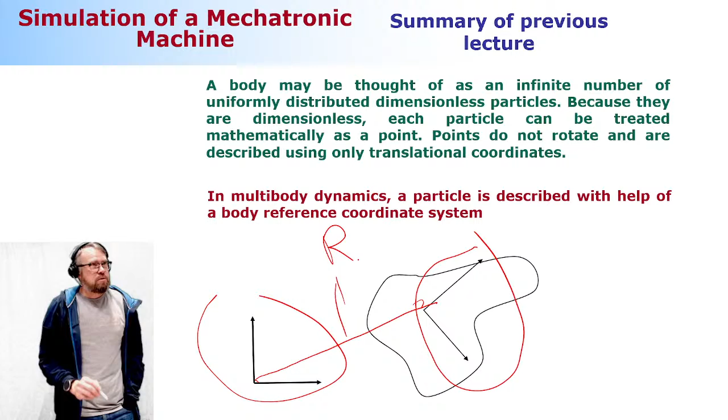We're going to use something that is called the body reference coordinate system. The body reference coordinate system is this one. It is attached to the body. So the body moves, the coordinate system follows; the body rotates, same story. Now, we're going to use the kinematic notations so that we can first describe where the origin of the body reference coordinate system is with respect to the reference coordinate system, using vector R. Vector R consists of two components, projections along this axis and this axis. And then we're going to use a 2 by 2 rotation matrix to take the rotation of this coordinate system into account.

All right, that's the mapping. Mapping that converts a description from one coordinate system to another. And this is going to be defined as matrix A. And then we're using vector U bar to define one single point, a particle if you may. So if I say the particle is located here, my vector U bar goes here. It's a little bit of a messy picture. So this is where the particle is located with respect to the reference coordinate system. That's called R. That's our kinematics.

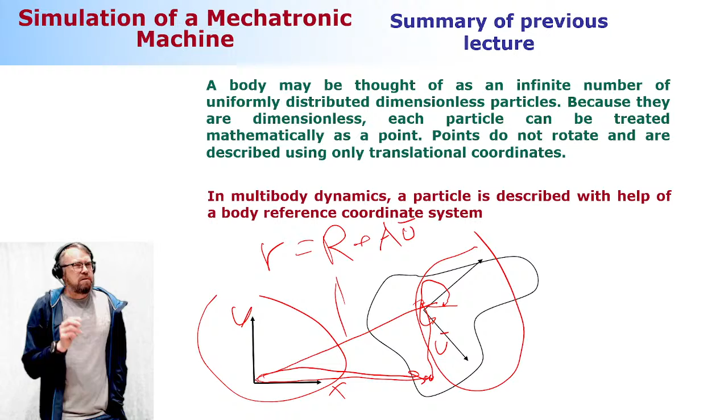That's what you have to follow no matter what. Every now and then in life and multi-body system dynamics, there are temptations to make life easier. And here the temptation could be that on some occasion it looks like there is a shortcut to the particle. Never ever take a shortcut. Always travel via the body reference coordinate system. That's how it goes. All right.

So here is the kinematics I just mentioned. I have here two components, one that is taking care of the translation and one that is taking care of the rotation. This one here is a 2 by 2 rotation matrix that is mathematically orthogonal, meaning that if you make vectors out of these columns, these vectors will be perpendicular with respect to each other. Perpendicular in the planar case means they will have a 90 degree angle with respect to each other. They are also unit in length, as is the case with the coordinate axes x and y.

And then this one here is the vector u bar we discussed a little while ago. That's the kinematics. Always, always, always follow this kinematics. And now it's confusing because we're using this vector u bar to define where the particle is located. The particle does not have rotational degrees of freedom, but the body reference coordinate system does. Don't get confused about that. Understand the difference between the point and the body. Point, no rotational degrees of freedom. Body, yes, rotational degrees of freedom.

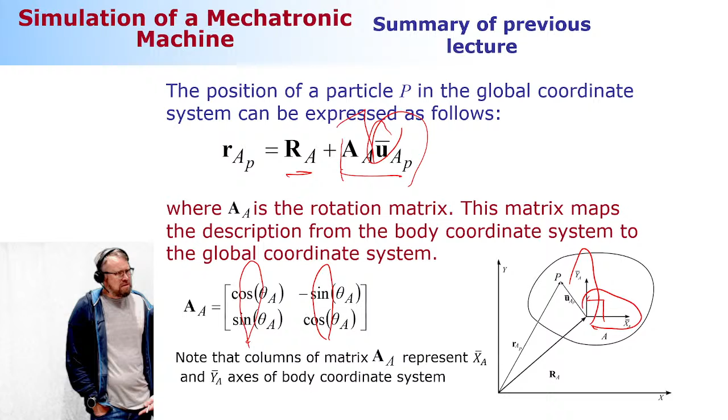A little bit of delay. How serious is it? Okay, 10 to 15 seconds is not bad. I can tune it, I can make it shorter than that, but that comes with the risk that the streaming is not healthy anymore. So let's not do it, because I can see that the connection is excellent.

Okay, so with that, what about three-dimensional space? How can we describe a particle in three-dimensional space? Same concept, different dimensions. Different in the sense that this vector R will consist of three components because of the three axes. Rotation matrix A will have dimension 3 by 3. And the vector u bar consists of three components, again because of the three axes.

Okay, this rotation matrix, one way to describe it is based on Euler angles. Euler angles is a method that uses three successive rotations. Successive means rotation after a rotation. So how does it happen? You have two coordinate systems initially parallel with respect to each other. And then you introduce the rotation, which is the amount of phi.

Well, Mustafa is not listening to me, but this one here, the phi, amount of phi around the z-axis. Then you have a coordinate system once rotated, and then you introduce the second rotation, this time around the x-axis, amount of theta. And again, you have a twice rotated coordinate system. This time you introduce the rotation psi. I knew it, I just wanted to test if you guys know. So, psi.

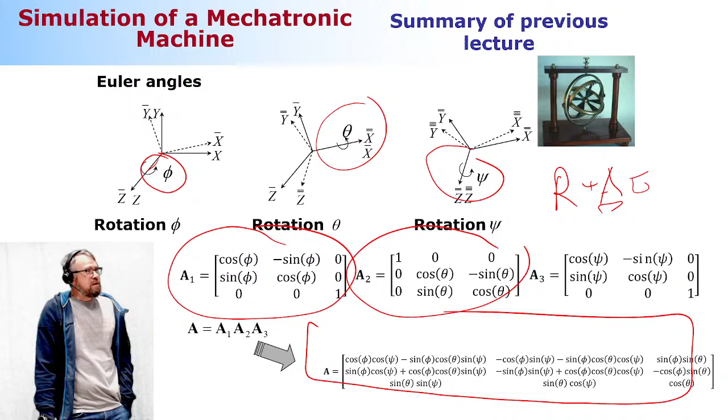So what you do then, mathematically, is describe each one of these rotations as shown here. And the successive rotations you take into account by multiplying these matrices together. And this is how it looks. Don't bother to memorize it. It makes no sense, you do not need that. But you need to understand the concept itself. Okay. All right, here's an example.

There is a question which says that the body rotates 90 degrees around the x-axis, because you see that this here is obviously the x-axis. Define the rotation matrix by using Euler angles. This is a matter of substitution. The first angle is going to be 0. The second angle is the one asked here, 90 degrees, which is pi divided by 2. And the third angle is 0. Once you do the substitution, this is how it looks. No thinking, just substitution, and that will do the job for you. Okay.

Tips for weekly assignments. Be careful with the radians and degrees when you're using trigonometric functions, because they will make a significant difference for sure. So make sure that you're not getting mixed up about degrees and radians.

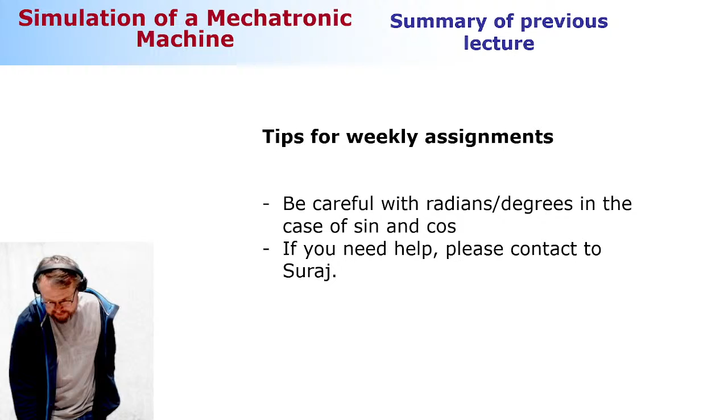All right, then still one more thing about the summary. This is how you can define the velocity. Very mechanical. And once we set the kinematics, it's very important to be consistent, all the time consistent. And you're going to learn this consistently along the course, when we're looking at the different things in this course.

Okay, so we differentiate particle position with respect to time. We've got two components that are translational velocity and angular velocity. When you differentiate this one more time with respect to time, we get acceleration. Acceleration consists of three components. Translational acceleration, normal acceleration due to the rotation, angular velocity. So acceleration is quadratically related to velocities, okay? And then tangential acceleration due to the angular acceleration.

That's it. Three acceleration components, meaning that later when we relate our inertia we will have two different kinds of components. One that is linearly related to acceleration, and one that is quadratically related to velocities. Correct, you heard me correct. So there will be an inertia component that is quadratically related to velocities. But you're going to learn that a bit later. So no worries today, but that comes a bit later.

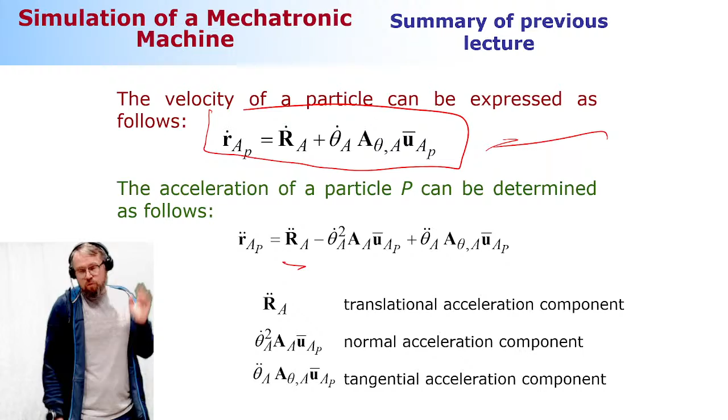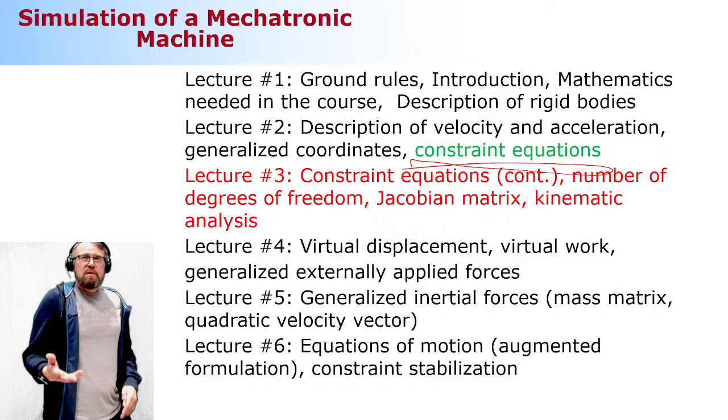Okay, constraint equations. Finally, constraint equations. This is where we are at. And there's a lot of details to look at. But this is, roughly speaking, motion limitation. The way we can connect bodies together. How we can do that mathematically. We know how to do that in real life. There are different kinds of joints, revolute joints, translational joints, so on and so forth. But how we do that mathematically, that you're going to learn today. Okay.

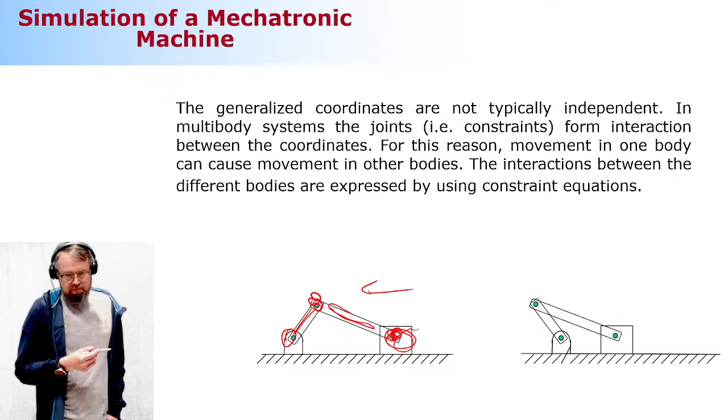Next, we're going to take a look at how we can describe these motion limitations, or motion limiters, if you may. Okay? So it goes like this. Let's first look at the big concept, and then let's look at the details right after that. Remember what we learned a week ago. We learned that every body needs 3 generalized coordinates. Always 3 generalized coordinates. And those 3 generalized coordinates are Rx, Ry, and theta for every body.

Now, if I have 3 bodies, how many generalized coordinates do I need? 9, correct, 9. Because 3 bodies, 3 multiplied by 3, that's 9. So if I have 10 bodies, I need 30, correct. That's how it goes. So that's the amount of coordinates I need to describe every single body in my system. Bodies in my system, okay?

All right, then you can list these variables. You can put them in a vector which is called generalized coordinates. The number of components and what they are depends on how many bodies you're dealing with, all right? So if I have just one body, this vector consists of 3 components. 2 bodies, 6 components, so on and so forth. Makes sense? Okay.

But then I'm going to introduce another vector. This time it is very unclear. It's just a concept for you. And this other vector is the constraint equations, these motion limitations. Motion limitations that connect these coordinates together. So these motion limitations are a function of generalized coordinates and possibly time.

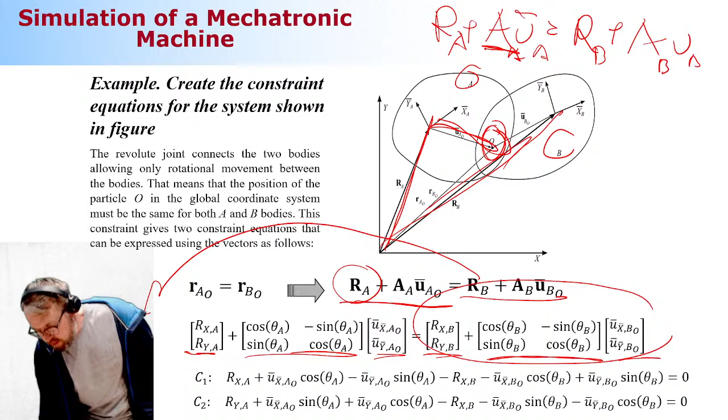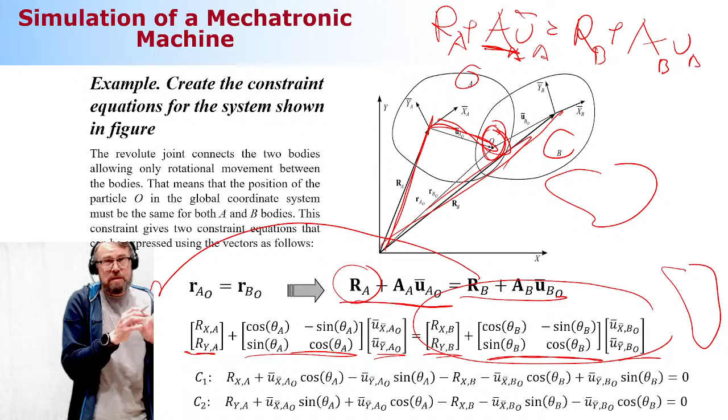So the question is, if there is a potato-shaped body here, A, and a potato-shaped body here, B, how do you connect these together? Well, if you want to connect them using a revolute joint, how do you do that in real life? By putting them together, because otherwise you cannot. So even though this is mathematics, it's not so far away from real life. You have to make them merge at the joint location. If they are like this, there is no revolute joint this big. There are different kinds of joints that don't necessarily need the bodies to be so near each other, but the revolute joint is the case where they need to be close to each other. Okay?

Is there Team Belgium today? No? Last week there was a Team Belgium for sure. But now I guess there is, but you guys just chose not to be my friend. That's okay, I'm used to that.

I'm not even disappointed. Okay, all right, two constraint equations. Remember what I just discussed. I said that this revolute joint allows these bodies to move this way, this way, this way, and relatively with respect to each other. That's a total of 4 different ways. How many generalized coordinates do I have when I'm dealing with two bodies? 6. 6 minus the number of constraint equations is my number of degrees of freedom. 6 minus 2, 4 degrees of freedom. So this is a 4 degrees of freedom system. Somebody was voting in the chat too.

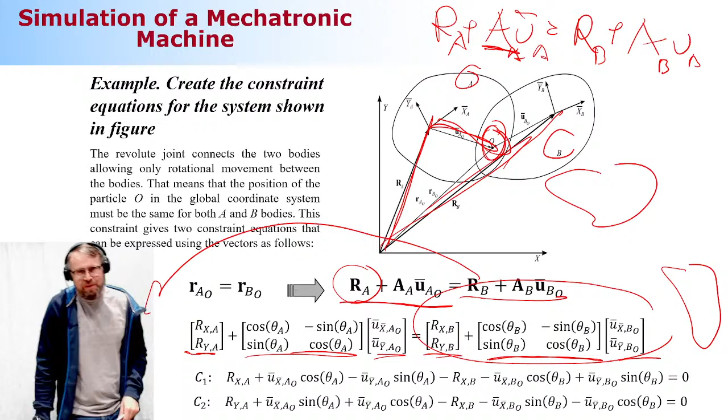Correct voting. So here's the number of degrees of freedom. Here's the formula to compute the number of degrees of freedom. The ingredients needed to compute the number of degrees of freedom are the number of generalized coordinates. How do we know that? We know that when we know the number of bodies. 10 bodies, 30 generalized coordinates. 2 bodies, 6 generalized coordinates.

How many constraint equations do we need? Well, that depends on what kind of joints we introduce. Some of the joints in the planar case need 2 constraint equations. Some of them need just 1. Okay, but that's going to be the number of degrees of freedom. That's how it goes.

Now, the number of degrees of freedom can have 3 different scenarios. And now I recommend that you put everything aside. Look at me, because I have some important information that I would like to share with you. Now, breathe very deeply. And one more time.

Now, these different scenarios are such that if the number of degrees of freedom is more than 0, 1, 2, 3, and so forth, we have a dynamically driven system. What does that mean? It means that, for example, this crankshaft mechanism will have 1 degree of freedom. And this 1 degree of freedom is actuated by a force or a moment. The moment introduced to this crank body is my force. This is a dynamically driven system.

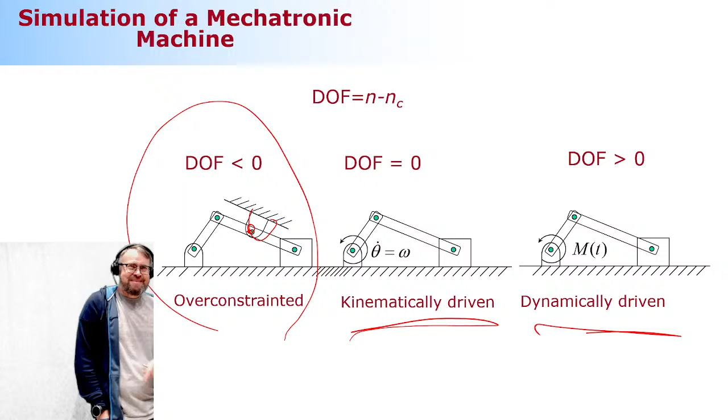But because you have such big brains, you have no difficulties whatsoever, so you understand this immediately. Right. You figured this out already when you stepped into this lecture room, maybe even earlier than that. Okay? So no problems. Guys back there, everything is okay.

Very good. Okay. The number of degrees of freedom in a kinematically driven system is what?

No, I'm not going to mention that anymore. But the game is on. So what is the success rate today? No, it will not. But how high does it go? 90. So Mustafa had a good sense of how high the success rate can be. He's saying 90, 96. And look at me, my hands are visible all the time, so it's not me that is voting incorrectly. So it's you, one of you.

Okay, so we'll get back to that. Somebody is saying there's going to be a dance today. I don't think so. That never happened, because I don't know how to dance, so I can make promises like that because I'm on the safe side.

All right, so let's continue then. Here are the number of constraint equations needed. I mentioned earlier that this is ranging from 2 to 1. I was incorrect, it's ranging from 3 to 1. So if there's a fixed joint, then it's 3, which, by the way, is not a good idea to model. You will learn later why it is not a good idea. But simply stated, every body needs 3 generalized coordinates, and that's the case also for the bodies that are connected to ground. So we'll have 3 generalized coordinates, 3 constraint equations.

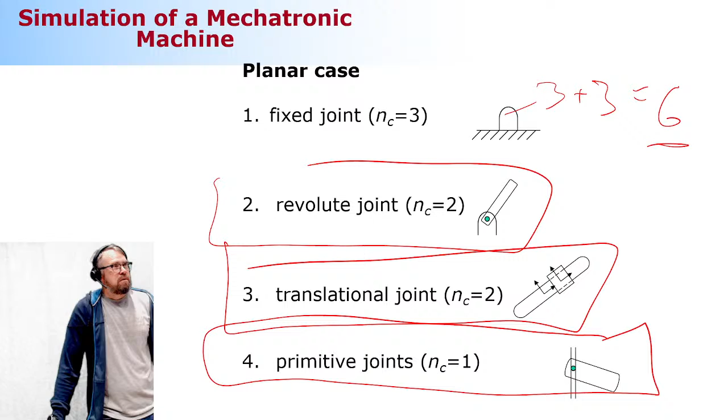Okay, let's practice a little bit. Here are 2 different kinds of mechanisms. We're going to practice a little bit, and then there's going to be another in-class quiz, but I'm expecting you to do the math. What is the number of degrees of freedom in this case? Let's first count the number of generalized coordinates. How many moving bodies do I have here? 1, 2, 3. How many generalized coordinates? 9. All right.

Then let's count how many translational joints I have. 1 translational joint, so that's minus 2 plus. And then let's count how many revolute joints I have: 1, 2, 3, 4. Happy? You shouldn't be, because this is not a joint. This is just to make you feel confused. So this comes 2 multiplied by 3. Sorry about the unclear writing. So that's 6, plus 2, so 8 constraint equations, 1 degree of freedom. So you got it.

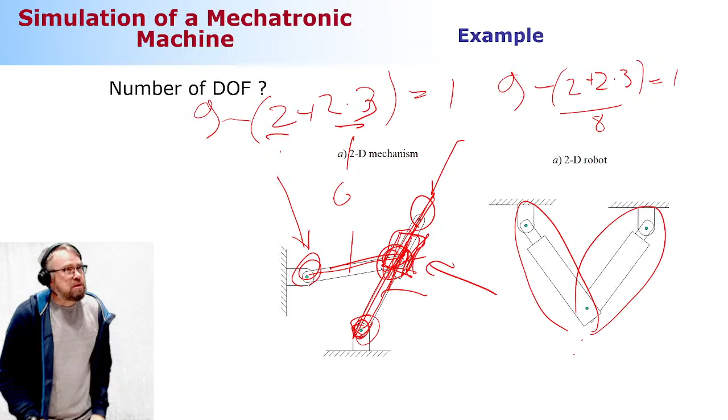Okay, the next. How many moving bodies? This is a little bit unclear drawing, but these are hydraulic cylinders. A hydraulic cylinder consists of 2 components, a cylinder and a piston, and these 2 bodies are connected together via a translational joint. So how many moving bodies do I have here? Let me repeat: each hydraulic cylinder consists of 2 bodies. So how many bodies in total? 4, correct. Meaning how many generalized coordinates? 12, correct.

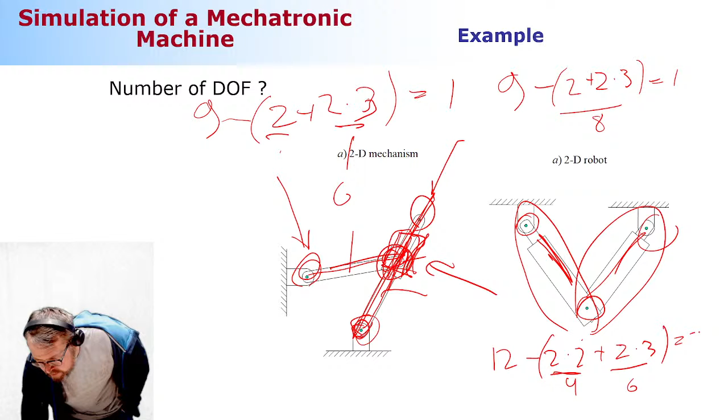Then how many translational joints? 2. So it's going to be 2 multiplied by 2, because a translational joint needs 2 constraint equations. How many revolute joints? 1, 2, 3. So that's 2 multiplied by 3. That's 4, that's 6. 2 degrees of freedom, because if both cylinders get longer, it moves downwards. If one is getting longer and one is getting shorter, it moves sideways.

You're with me? Why are you so quiet today? That is because it's a Monday, right? Sorry about that. But people in the student affairs office don't like me, so they give me either Monday morning or Monday afternoon lectures, and I figure Monday afternoon is better than Monday morning. All right, so, number of degrees of freedom.

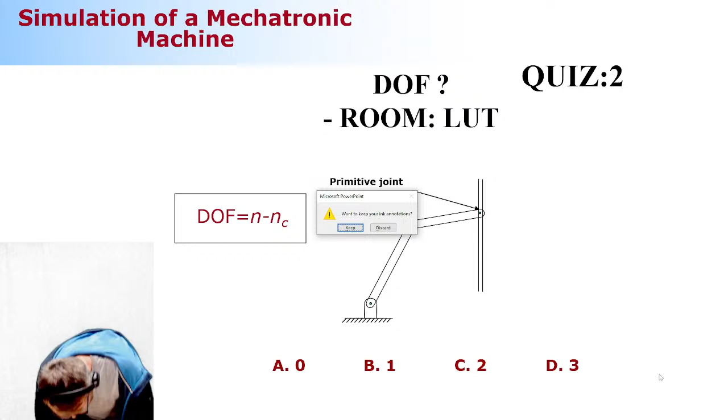Okay, let's take a look at the in-class quiz. First one. Hold on, I need to take a look at this one. Okay, you guys don't see this. I would like to share this with you, so just a second.

Yep, here it is. Okay, so what's the success rate? So what are the cases? 96. 99. Okay. Is it going to be 100? Yes or no? No. Okay. Ooh. Close case. Very close case.

But not 100%. Okay, so I felt a bit nervous, to be honest, because I was repeating that zero so many times that I thought that this is going to be dangerous to me. It wasn't. So I guess that I can be more relaxed next time, so I can tell you even more. Okay, so the success rate is, we were pretty close. 95. Okay, let me take us back.

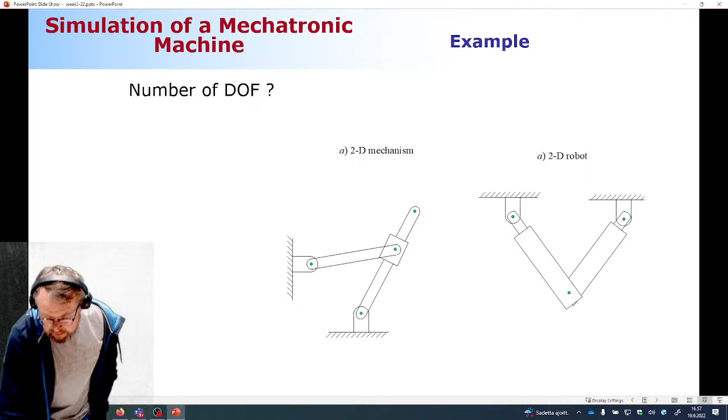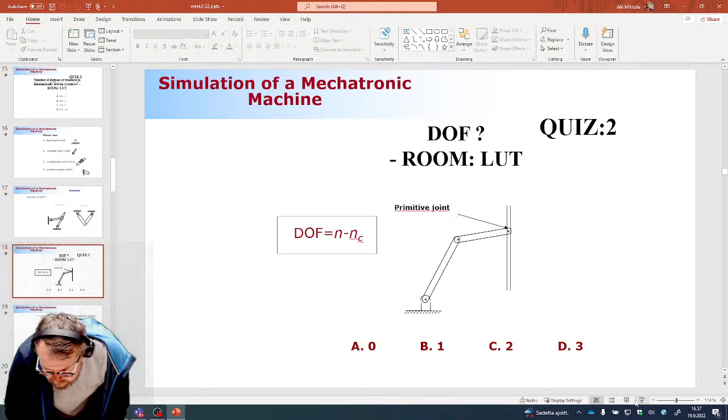Last example. Okay, so let's go to this. This in-class quiz, I'm gonna put it on, but you can wait a while because this goes to next. Take your time because I'm gonna explain this example one more time. What happened now? No, this is in a different mode because it's not allowing me to draw. Go and discuss with your fellow students. Remember, I'm here ready to discuss with you too. Okay, this example. All right.

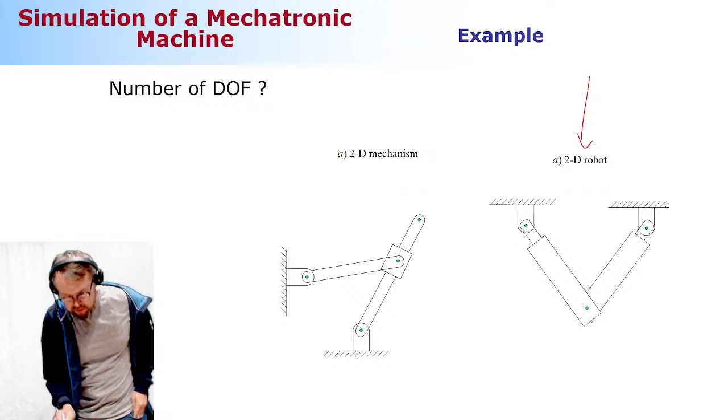All right. So in this second example, I have two hydraulic cylinders. Hydraulic cylinders, when you look at the cross section of them, they look like this. There is a cylinder and a piston. Now this piston is one body, and the cylinder is a second body. This piston moves like a translational joint with respect to the cylinder. That means one hydraulic cylinder has two bodies, connected together via a translational joint. This is my first hydraulic cylinder. This is my second hydraulic cylinder.

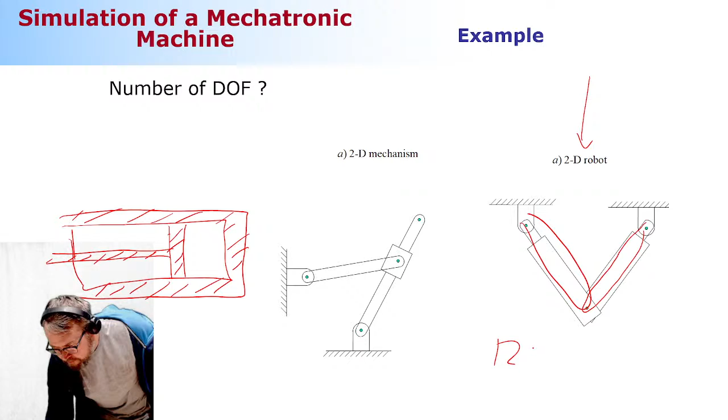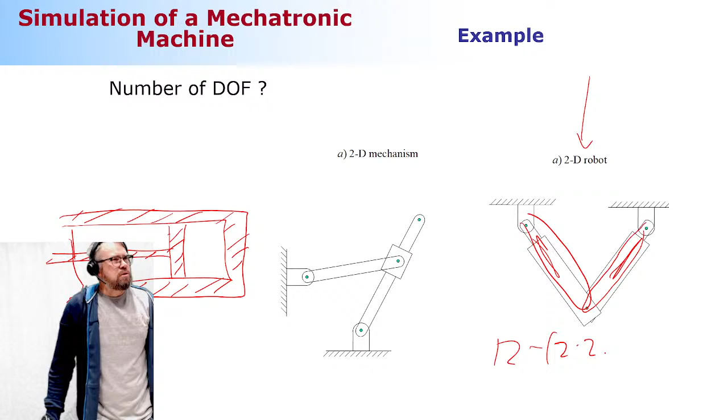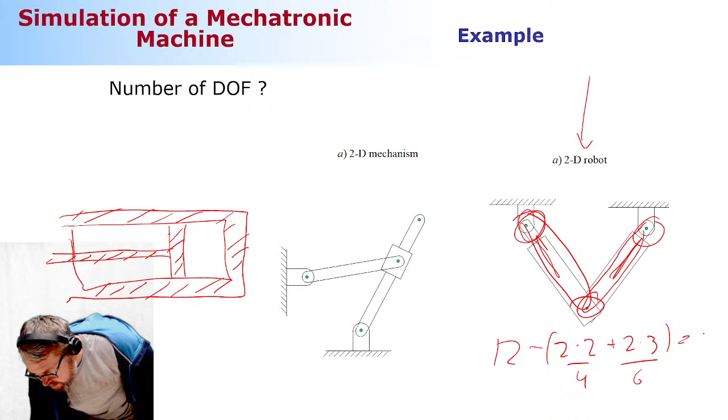That means that there is a total of four moving bodies. 4 multiplied by 3 is 12 generalized coordinates. Then I'm going to take a look at the constraints. I have here 1 and 2 translational joints. Each of them needs 2 constraint equations. Then I'm taking revolute joints into account. So there's 1, 2, and 3. So it's going to be 2 multiplied by 3. That's going to be 6, 4, 2 degrees of freedom. Okay, back to this.

100% or not? No, not 100%. But how much if not 100%? 45. Yeah, by the way, I see that there is quite a bit of delay because I'm coming back right now, like 15 seconds or so.

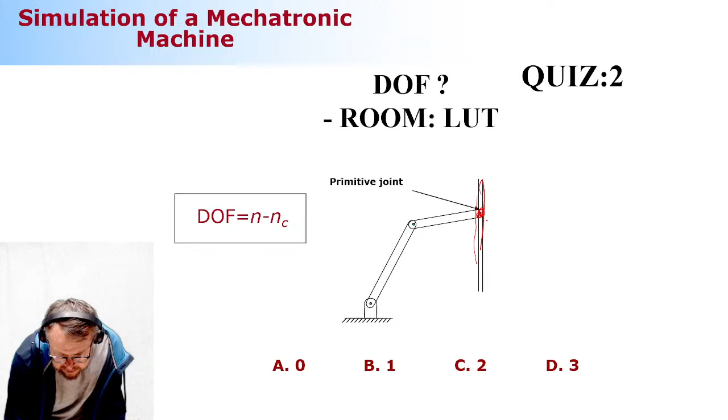I see that it is about time to have a break. Would you like to have a break? No? Okay, so let's continue a little while, and then you can have a break. Okay? All right.

A little bit about terms, which is not so significant, but for your information: what the different constraints are called. So, holonomic constraints are the ones we're typically looking at. Those are functions of generalized coordinates, like revolute joint, translational joint, and so on. Then there are non-holonomic constraints, which we will not touch in this course. A non-holonomic constraint is like a disk rolling on a surface. We are not going to look at those, so you can be safe.

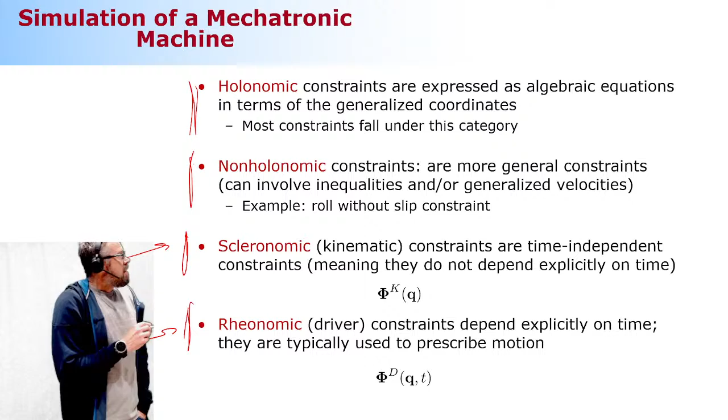Just to give you an example, if you have a revolute joint, you need to use 3 constraints to limit the translational motion and 2 to limit the rotational motion. A total of 5. Okay. Same for translational joint, but the different thing. So it's going to be 3 rotational degrees of freedom, 2 translational degrees of freedom. And then different combinations, depending on what kind of joints you're dealing with.

I have here a door. You know the mechanism. I'm sure you have used it before. So you can close it or keep it open. Okay, so how is the door? Let's count the number of degrees of freedom in a door. Okay, so now we are in a spatial case. In a spatial case, we have 6 generalized coordinates for each body. So this door needs 6 generalized coordinates.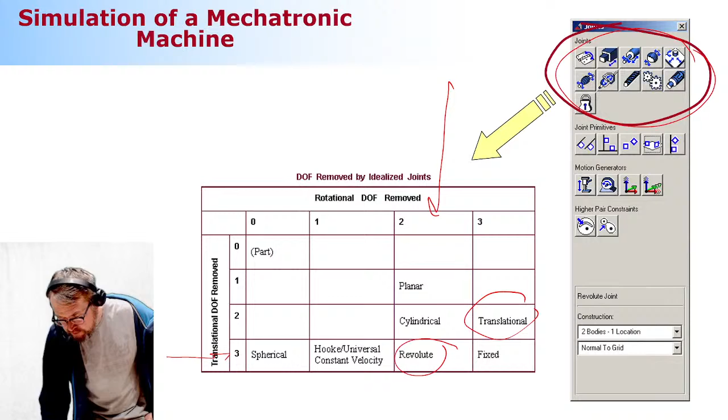A revolute joint needs how many constraint equations? 5, because of this table. Here is a 5, total of 5. So that's going to be 6 minus 5, so it's 1 degree of freedom. That seems to make sense. But in real life, when you look at the door, they're not constructed by using 1 revolute joint, but 2 or sometimes even more than that.

So let's count how many degrees of freedom we have in real doors. How many generalized coordinates? 6, because no difference between this case and this case. And then I have here, that's supposed to be minus, of course. Minus, and how many revolute joints do I have here? 2. 2 multiplied by 5, that's 10. Minus 4. Minus means that the system is over-constrained, meaning that it cannot move.

So this is it. End of the story. So we are locked in this lecture room the rest of our life because it was just mathematically proved that it will not move. Scary. What explains this? You agree with me that we cannot go outside of this lecture room? What do you think? Let's vote. Can we go out or can we not? Who is voting we can? We can. We cannot, because mathematically it proves we cannot.

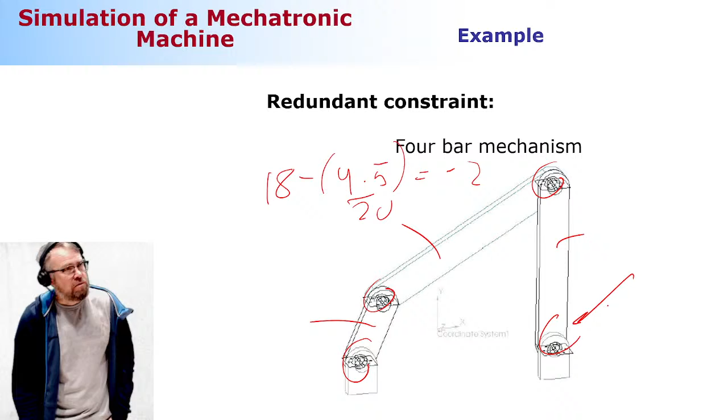Okay, there are more examples about to come, but I can tell from your faces that you need a break. Okay, is it going to be a 100% success rate regarding that? No, but how low do we go? How much? 7. So the first digit will be 7. What is going to be the first digit? Oh, somebody's saying 5%. That's low. That's very, very low. 5 is too low, I think. I hope.

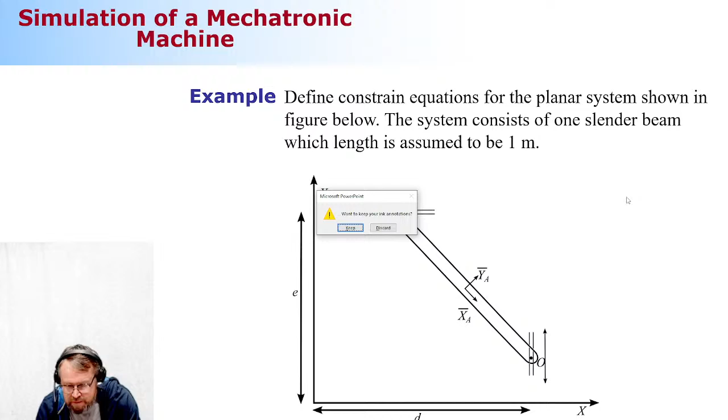Okay, so let me. Would you like to see the results? I mean, the audience? Oh, you don't see it at the moment. So, okay, we will take a look at the duplicate. Okay. All right, so what is the correct number? One and two. No, it needs to be one. Just tell me one number. Correct. 84. Very good. But not 100.

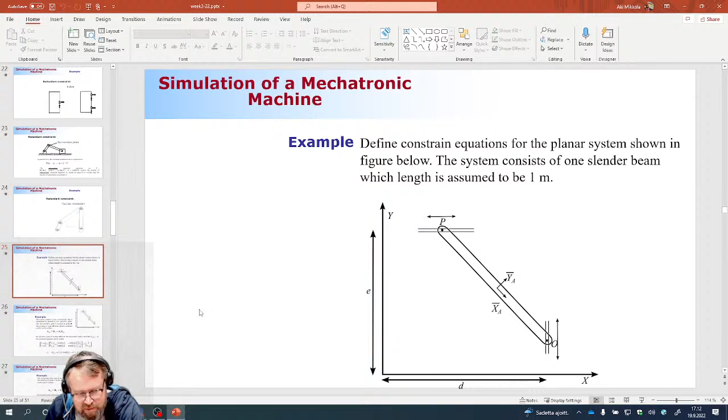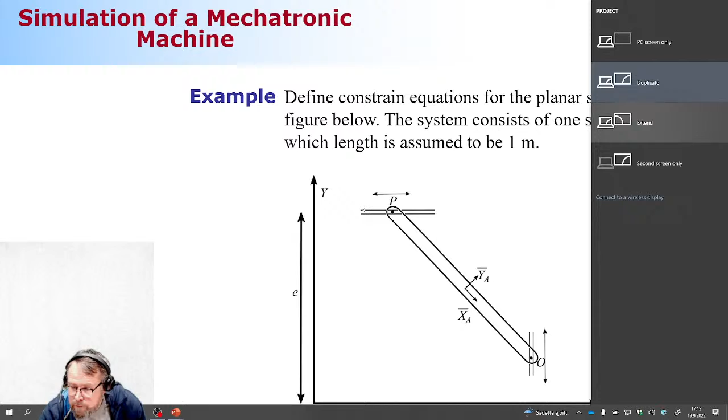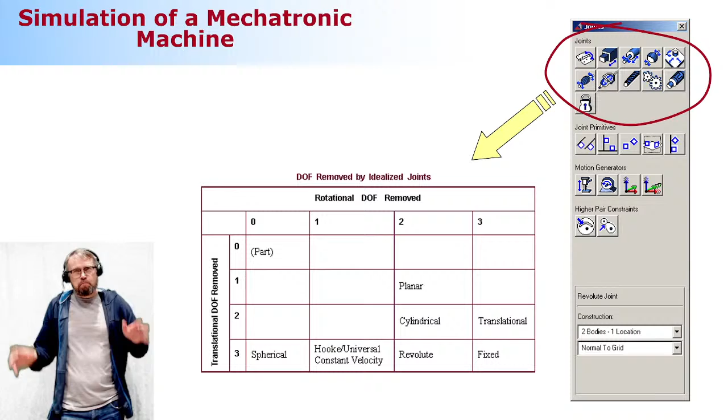Okay, very good. So during the break there was a request: can I explain where this number six came from in some of the examples. I know this is a bit confusing. I mentioned in the beginning that this course is mainly focused on two-dimensional cases, but there are a few exceptions. One is related to these rotations, and here is another exception. These particular joints are in three-dimensional space, the spatial case. In a spatial case, one body needs how many generalized coordinates? 6. Planar case, it needs 3.

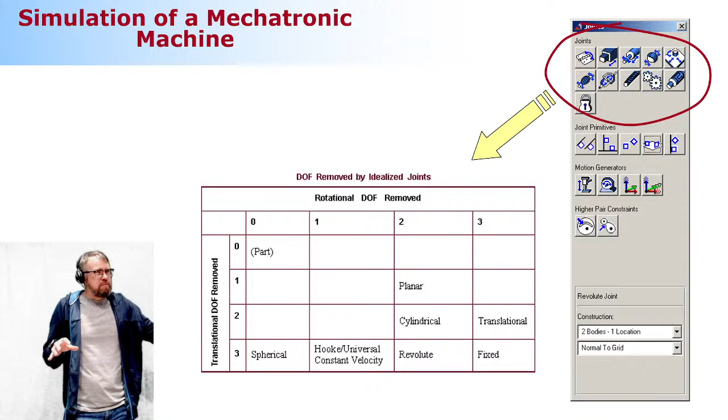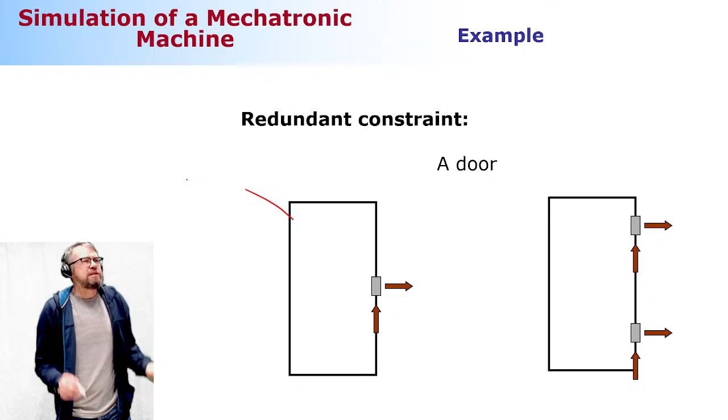All right? So there was a question about where this number 6 came from in this door case. That came from the fact that the door is described in three-dimensional space, meaning that it consists of 6 generalized coordinates. So a different story then. And this too is a three-dimensional system. That's all about three-dimensional systems. We're going to focus on two-dimensional cases from now on. Okay?

Okay, let's take a look at the example then. I have here a very simple mechanism that consists of one body only. The body is connected to ground using two prismatic joints. Here, point P is connected to ground in such a way that P has to be along this line all the time. It cannot move in the global y direction, but it can slide along the global x direction. This motion is not possible.

Then I have another prismatic joint, located at the other end of the beam-like body. This one is opposite to the one we just looked at. It can slide up and down, but it cannot move left and right. Okay, so these are my joints. What is the number of degrees of freedom?

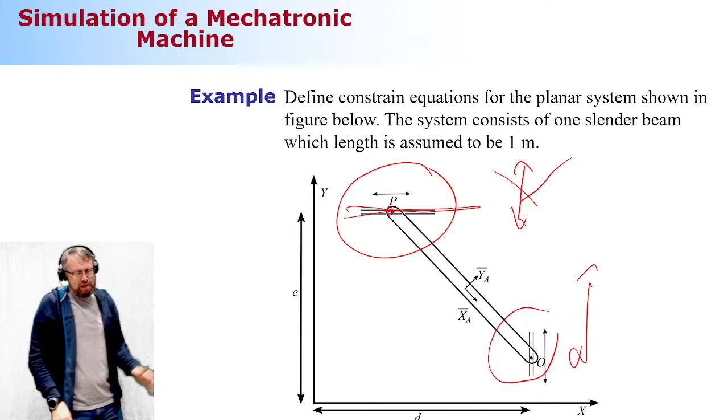Correct. So this is going to be a challenge to describe how it moves. You can imagine that in your head. So you understand it goes like this, kind of. But it's a little difficult to describe. Okay, I don't even try to do it anymore. But anyway, you got the concept. Okay, and we need to define constraint equations. Any idea how we can do that?

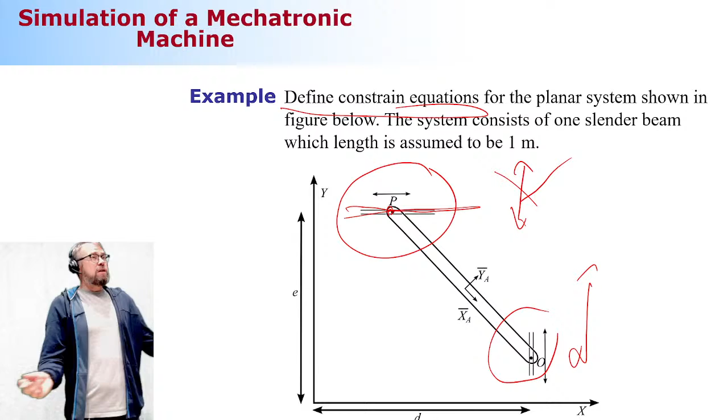Can we simply use this equation, the only equation we know, because so far we learned one equation? We have to because we have no other choices. This is the only equation we know. So let's use it. Let's get started here from the reference coordinate system. Let's first travel to the origin of the body reference coordinate system using this vector r. And then we're going to go left and right, depending which one of these two constraints we would like to introduce.

So let's get started from O. First we're going from here to here. This is vector r. Then we're going to take the orientation of the body into account, this 2 by 2 rotation matrix. And vector u bar. What is vector u bar? We're pointing this direction. So how much do we need to travel along the local x direction? L divided by 2, because it's a positive direction. How much in the y direction? 0.

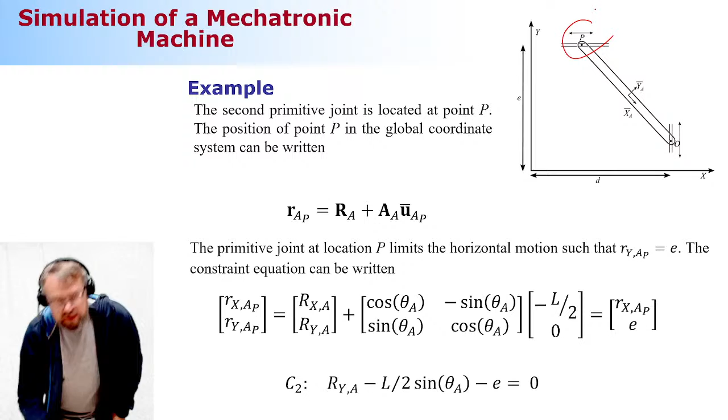This is my 2 by 2 rotation matrix. Now, look, the positive x is pointing this direction, so I need to move minus L divided by 2. How much in the y direction? 0. And I'm going to set my constraint to the y direction. That's going to be my second constraint equation. Very easy. Not difficult. Good.

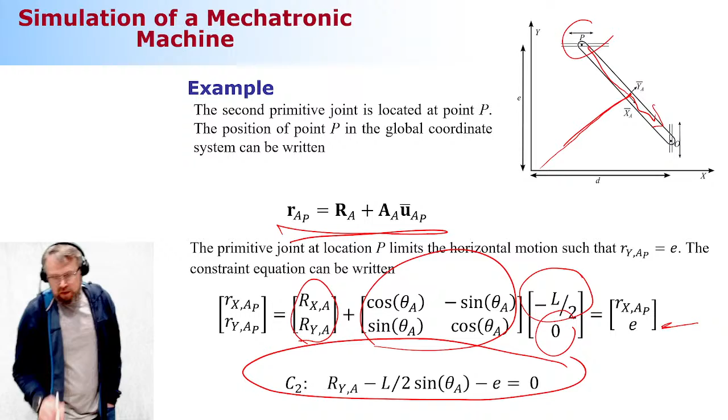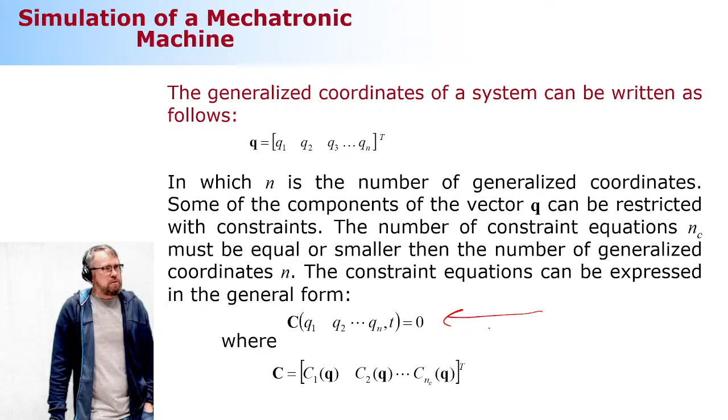And the choices are: interconnect generalized coordinates, meaning they create relations between the generalized coordinates; they define the center of mass of the body; they define the physical dimensions of the body; they define a particle rotation. One is very much off, one is correct. Okay, no, this is not yet on, so let me put this on.

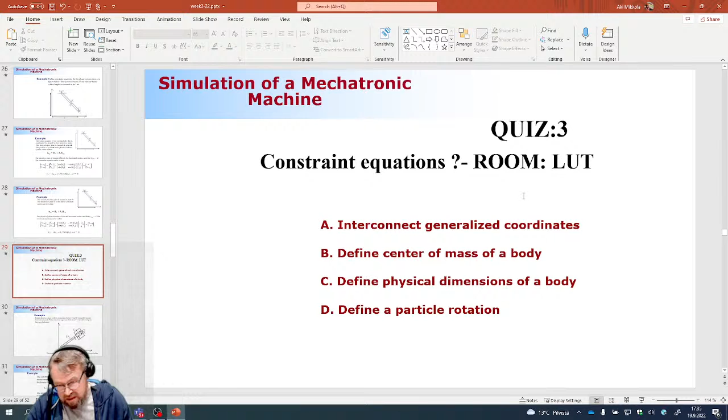Here, constraint equations. What is a function? Oh, yeah, I'm not going to show that because this annoying system takes it too slowly. We get back to this momentarily, all right? You say nothing yet. Yep, here it goes.

Okay, would you like to get some help? Or is this clear? Everyone clear? Okay, for online participants, here the people in the lecture room, they say, okay, can-do attitude. I know exactly what is the right answer. No problem whatsoever. And I see that, okay, so there are comments which I'm not willing to mention to you because they are related to this final option D.

Okay, now here comes something that I will be a little bit brief on because there's one very exciting in-class quiz left, two actually, but one that is very exciting that I still would like to do today. So the next example is how you can do the translational joint. Okay, this is mathematically a little bit involving. So this is not as easy, but doable.

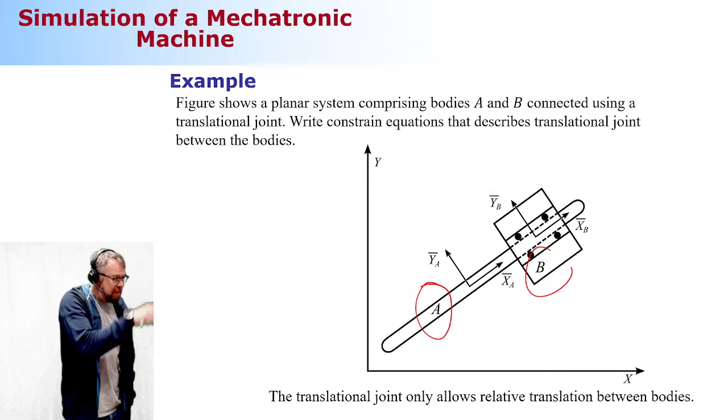Anyway, so two constraint equations. One is very, very simple because what this translational joint is doing for you, it is saying that the relative rotation between these two bodies is no longer possible because they're sliding along. They cannot move like this. So that's a constraint, and a very simple one. So I'm going to take the rotation of body A, rotation of body B, and set them to be constant. It could be 0 if they are oriented as shown here. C in the scenario shown in the picture is equal to 0. All right? Yeah, it seems that everything is okay. So that's going to be my first constraint equation.

Second constraint equation is a big pain because I'm going to introduce two vectors and I'm going to use the perpendicular condition of these two vectors to set the constraint that allows them to slide along. All right? So I'm going to introduce the vector k and a vector h. H and k will be perpendicular with respect to each other. And k will be the one that connects bodies A and B. This h will be related to body B only, and that's what I need to define this sliding along condition.

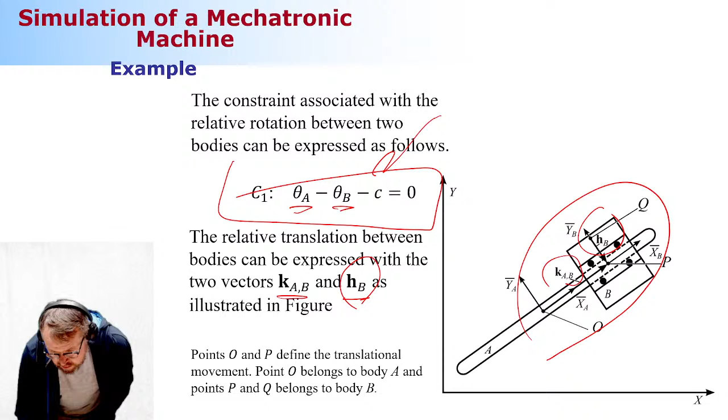So here's a magnification of the situation. Going to be pretty fast today. I'm not going to look at that very much in detail, but if you need details, take a look at the lecture notes. All right? So I'm setting 3 points, O, P, and Q. And now I'm going to repeat this whole story again. So I'm going to define point O, point P, point Q using the only equation that I know. And what is that equation? Well, that is an equation that defines the kinematics. This one.

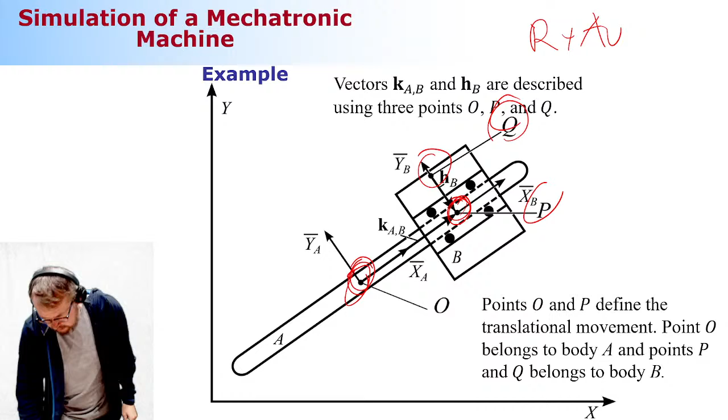And then using these 3 points, I can make a vector that starts here and ends here. That's going to be my first vector. And I can make a second vector that starts here, ends here. And I set them to be perpendicular, meaning that the vectors multiplied by each other are set to be equal to 0. That's the perpendicular condition in mathematics. That's it. That's the big picture. And now in detail it goes like this.

So I have first point O, which I'm defining using this equation, the only equation that I know. And I come first here, and then using vector u bar, which in the scenario shown in the picture will be equal to 0. This one will be equal to 0, but let's keep it this time. And then point P, which will be with respect to this box-like body. I'm going to go to this point here. I'm going to set this to be 0 as well. I'm going to create it like this. Start it here, end it here.

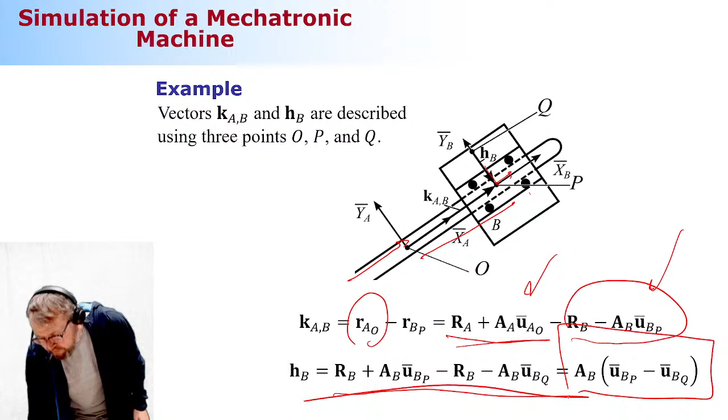And then the H will be in one body only, so I can define it as it is shown. And now when I simplify it, I can express it as it is shown here. Final thing needed is this perpendicular condition. H transpose multiplied by KAB needs to be set equal to 0. That means that these two vectors will have a 90 degree angle with respect to each other. That's what it means mathematically.

Let's do it. It will look very bad, but let's just make it happen. So this is my H. This is my K. And when I multiply them together, well, I'm simplifying these components. And when I do the math, this is how it looks. That's my second constraint equation. Okay? Not easy, but doable. Okay? You agree?

Are you still alive? Because what I can see is like this. Okay, yeah, this was just an example. All right? So

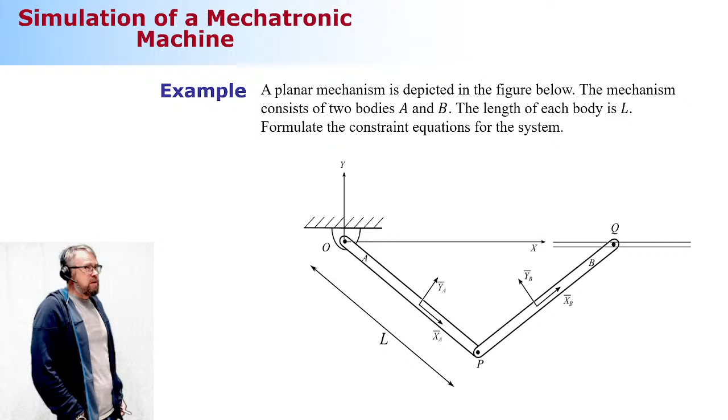Let's look at one more example. Okay, here is a mechanism that, let me see, I have 15 minutes. Maybe I can do a bit more than this, but this is a mechanism for which I would like to create constraint equations. Okay, 2 moving bodies, 2 revolute joints, 1 primitive joint. Okay, here comes a big surprise. What is the number of degrees of freedom?

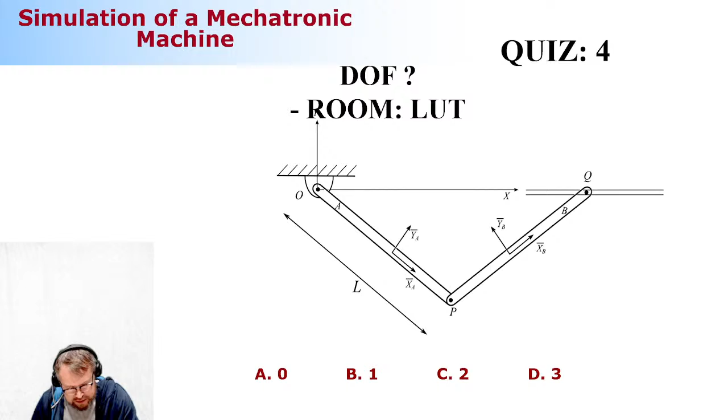Okay, hold on. I need to look at this first. Just a second. Okay, so let me take myself. Actually, I realize that I have less than 15 minutes left because we only have a 10 minute break. Okay, constraint equations. Hold on. Oh, you don't see this. Just a second. Would you like to see the success rate of the constraint equation in-class quiz? Yes. Okay, me too. Okay, so I need to do this, duplicate, and you will see this momentarily. Here it goes.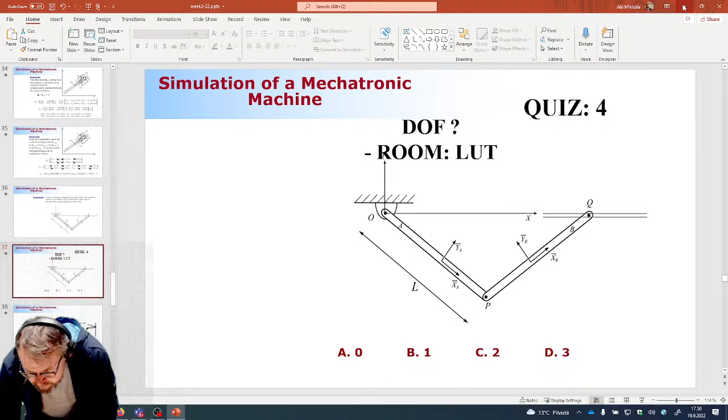Okay, let me take myself back here, and I will let you go soon, but not right now. Okay, I need to disconnect this one. Oh, you don't see it yet. Okay, here it goes.

All right, so this is my example here. So I need to create constraint equations. Okay, so I'm going to use the only equation that I know, and I'm going to define these points O, P, and Q. All right, now comes the first temptation. What is a temptation here? Temptation is that you go from this reference coordinate system directly to point O. Not allowed. You need to go first to the body reference coordinate system, and then back with help of vector U bar. So put this temptation aside and do it using the only equation we know. Be consistent.

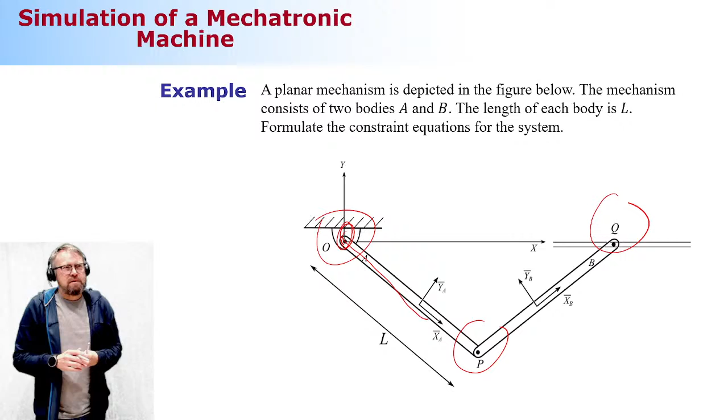I haven't really watched this TV series Temptation Island, but I guess that this is the same kind of story. I guess so. Not sure about that.

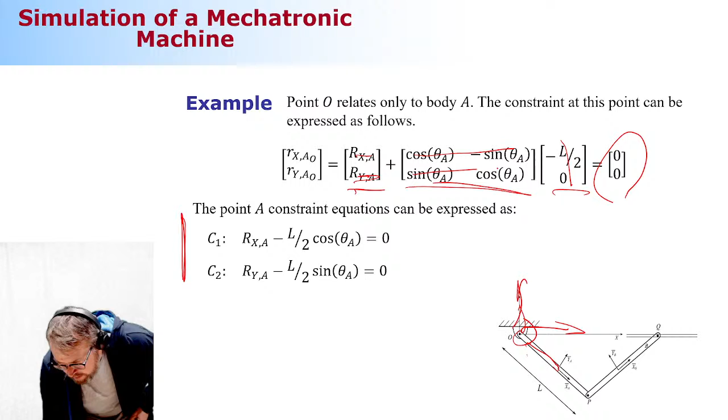But anyway, so it goes this way. We go to this point O by first traveling here and then back. So first here, which is vector R, we take the body orientation into account, and with help of vector U bar, we go back. This point has to be at the origin of the global reference coordinate system. That's why these two components will be equal to 0, because it cannot move with respect to the reference coordinate system, and the reference coordinate system is located here. Makes sense? Once you do the math, that's going to be your first two constraint equations. You multiply this by this, set that equal to 0. This one, multiply this by this, set that equal to 0. That's it.

Second constraint is point P. It is common to body A and body B. We know already how to do that, so there are no surprises here. We first go to this point by using body A, and we redo the whole job, but this time using body B, and we set them to be equal. Vector U bar, we need to move in the positive direction, which is L divided by 2. For the second body, we go first here, then take body orientation into account, and then the U bar. This time we need to move in the minus direction, because we look in this direction. That's why minus L divided by 2. You set them equal, and that's going to be your third and fourth constraint equations.

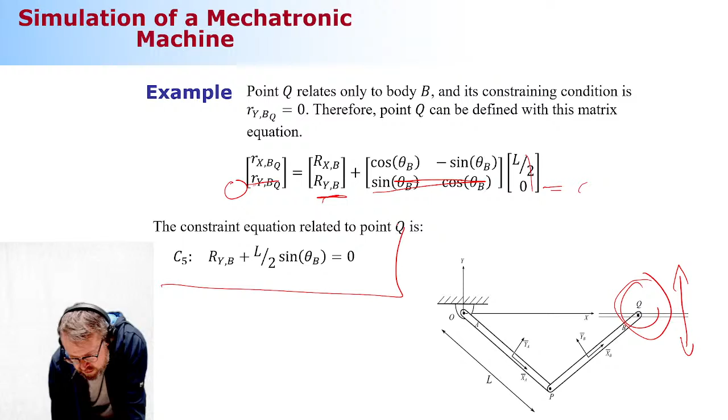And the last one is going to be a primitive joint, where this point cannot move along the global y coordinate axis. So I'm going to say that this row here has to be equal to 0. So it's ry, then this row multiplied by this vector needs to be set to 0. And that's going to be your fifth constraint equation. We did not have time to look at the Jacobian matrix or kinematic analysis, but we'll do that next week. Kinematic analysis is an analysis where we can solve the motion using constraint equations only, nothing else. Just constraint equations.